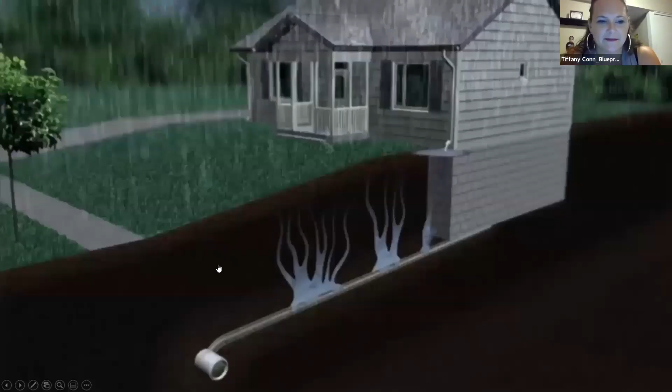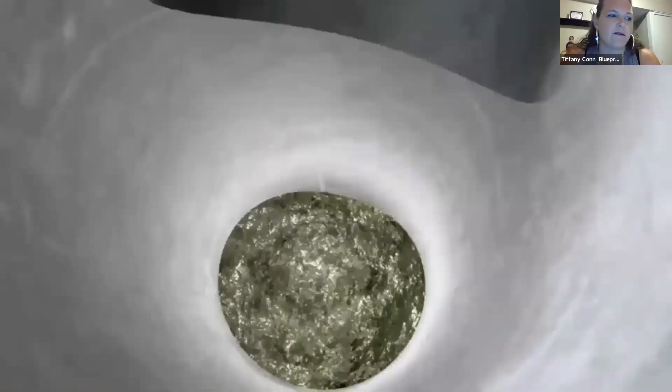So what's happening is when it rains, we have aging infrastructure and water is getting in through these damaged pipes, through cracks, leaky joints, and runoff from the roofs. Most of the rainwater is getting into the system from residential areas. And these sanitary sewers are not built to carry both rainwater and sewer water. So what happens is during large rain events, this water will back up into your basement or will overflow into rivers and streams. So this is what we are trying to solve.

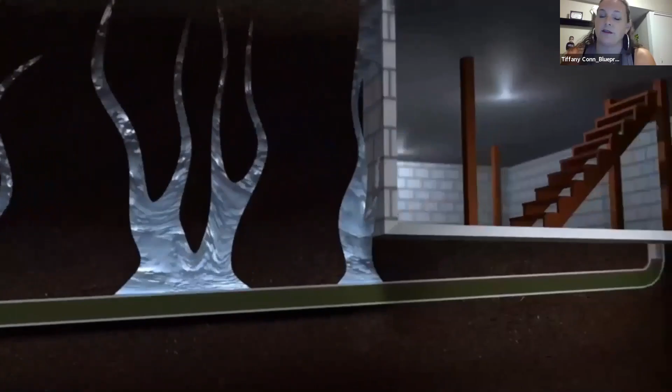As you can see, again, it's just not having the capacity to take the rainwater and the sewer water at the same time. So that is essentially our issue. The water is pouring out into the river, and this is a human health concern. So, we don't want this by our families, we don't want this by our schools, and this is the issue that we're wanting to take care of. Next slide, please.

Little bit of a recap. So this rainwater is getting in through these cracks. So that might be from trees. It might be because the pipe is old, it's made of clay, or the joints between the pipe that attaches to your house pipe might have a little space in it and it's getting in through there.

So we're also concerned with when it's raining really heavy, the rain washing down the street is picking up a whole bunch of stuff. It's picking up trash and pollutants, it's picking up debris, things off of the brakes of your car, just any old thing that's on the street and rushing down, going into the storm sewer, and eventually makes it out into the river. So all in all, our water that's getting to the river is not the cleanest and it is not the healthiest for us. Next slide.

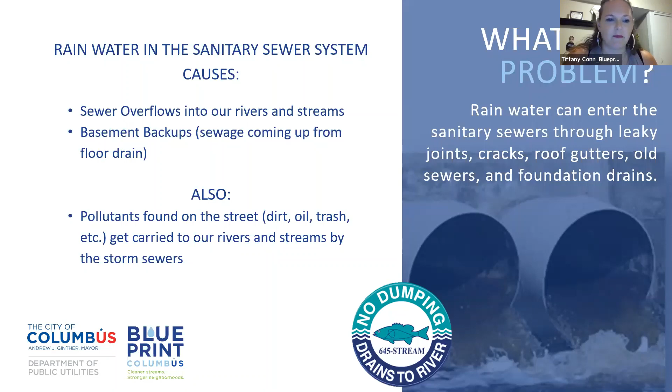So what Blueprint is trying to do is solve this issue at its root cause. So we could build bigger pipes and then that would have the capacity to take the rainwater and the sewer water. But why would we do that? And eventually we'd have to build more pipes or bigger pipes in the future and keep solving the problem that way. So what we're looking to do is start from the beginning at the root source of the issue and get that water to go where we want it to go.

So separate this water to get to the storm sewer if it needs to be, and then the sanitary water to go to the treatment plant where it's supposed to be as well. So we are investing in fixing our existing infrastructure rather than building new infrastructure. What this does is create opportunities to actually improve the water that is making it to the river or the stream. And all of the pieces of Blueprint, which you'll see in just a second, work together to move the water, like I said, where we want it to go.

So we want it to go out to the street instead of be around your house. We want to treat it with green infrastructure so that it is actually cleaner when it gets to the river. And we want to involve the community in this. We're trying to improve the rivers. We're trying to help the neighborhood leave something good behind for the neighborhood and also the local economy. So we use local contractors, designers, engineers, as much as we possibly can so that we're investing back into the local economy. Next slide, please.

Blueprint is going to be and is in 21 different project areas throughout the city of Columbus. As you can see here, they're kind of scattered around, and the one thing that they have all in common is separate sanitary and storm sewer systems. That blank space in the middle, kind of downtown and up through Upper Arlington, has a combined sewer system, and that's why Blueprint is not involved there.

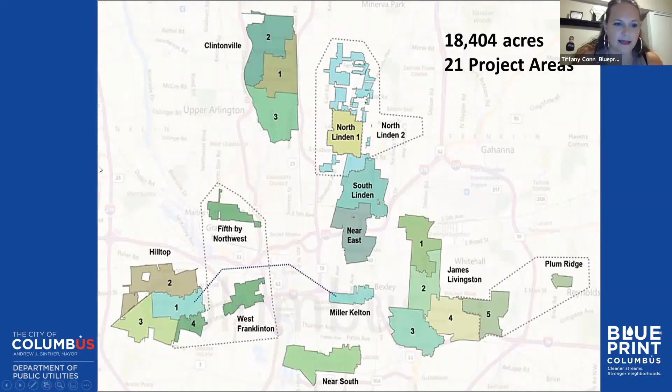Next slide, please. The 4 pillars of Blueprint all work together to accomplish our goal of moving the water where we want it to go. We have lateral lining, roof water redirection, sump pumps, and green infrastructure. We'll go through these in a little bit more detail. Next slide, please.

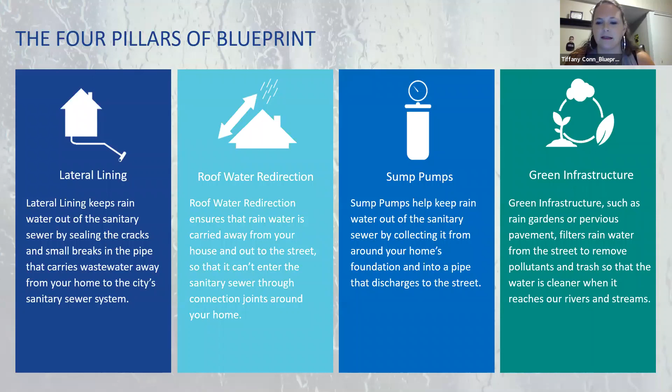Lateral lining might be the most crucial part of our project. What we're trying to do with the lateral lining is seal up the system. That's where the water is getting in the most, in these residential sanitary laterals. What we want to do is check out all the laterals in a project area, see what the condition of them is. If we can clean them and line them, we'll do that.

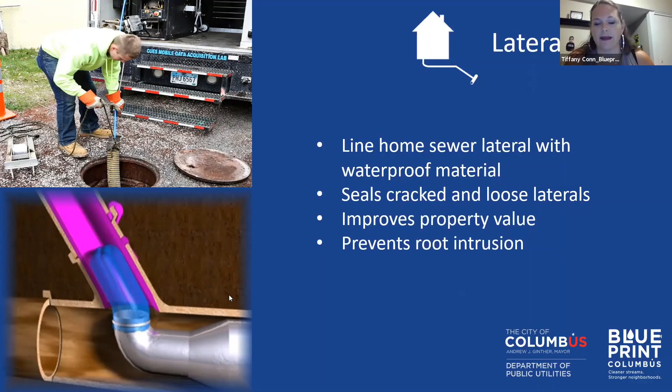We send a balloon-like structure up the lateral. It's got resin on the outside. When that resin cures, it's hard like a pipe. So it's like a brand new pipe inside of that lateral, and it does not allow the tree roots to get in, and it helps prevent cracks and leaks, thereby sealing up the system. It's a really great property value, but it also really helps us keep that water going where it should be going and out of where it doesn't need to be. Next slide.

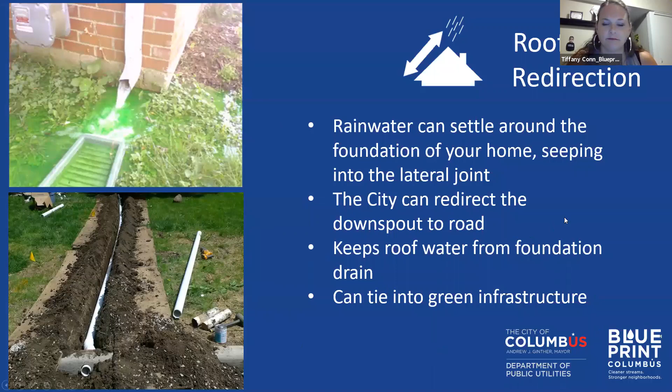Sump pumps are also helping us route the water away from our foundation. And this is, I think, probably one of the most exciting parts for residents: houses in the project area, if the duplex or single family home does not already have a sump pump, has a basement, and we're able to put one in, can get one free of charge from our project.

Some of our older houses have the foundation drain connected to that sanitary lateral. All that water is going straight out to where we don't want it to go. When we put in the sump pump, we try to disconnect that and connect it to the sump pump so that the water goes out to the street where it's supposed to go. It also helps with seeping in the basement. So it's also a benefit to the homeowner, to help get water away from your house and keep your basement a little drier.

The city does provide the installation, the sump pump, and a backup battery. We are currently installing sump pumps in Miller Kelton. If you are interested, in the chat you can put your name, your phone number, your address, and email, and we will sign you up for that. You can also shoot us an email. I believe we can put a link in the chat as well so that you can go straight to the link and sign up. Next slide.

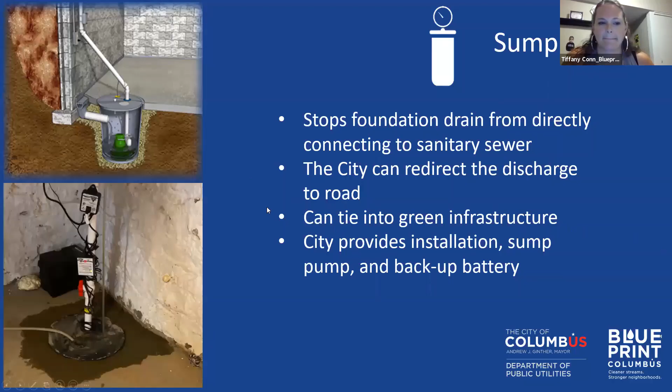Today we're going to focus on green infrastructure. You probably want to know what's going to happen in your neighborhood, but I want to make sure we know why we're doing this first.

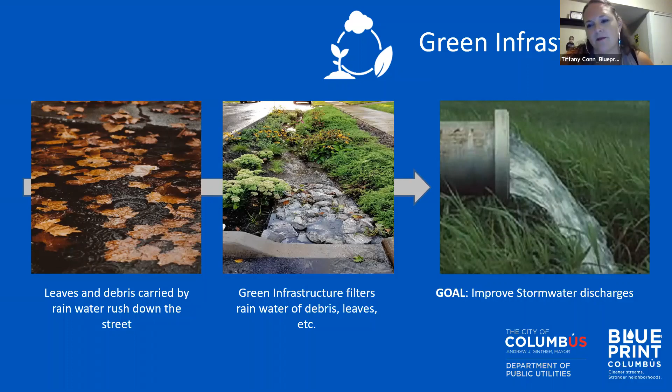When rainwater is rushing down the street, it's picking up leaves and debris, and we don't want that. It goes into the storm sewer and ends up in the river a little dirty. If we can send this water through green infrastructure, we can filter out that debris and leaves before it makes it to the river, so it's cleaner when it gets there.

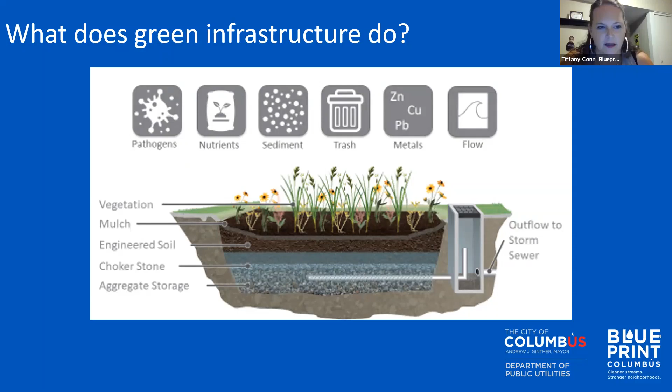Pervious pavement is kind of a crazy construction process, but it's really beautiful when it's done, and it helps in other ways too, like calming traffic - people driving down these pervious pavement streets tend to drive a little slower. It filters out the trash and debris, just like a rain garden, and it actually reduces street flooding by giving that water somewhere to go instead of just sitting there.

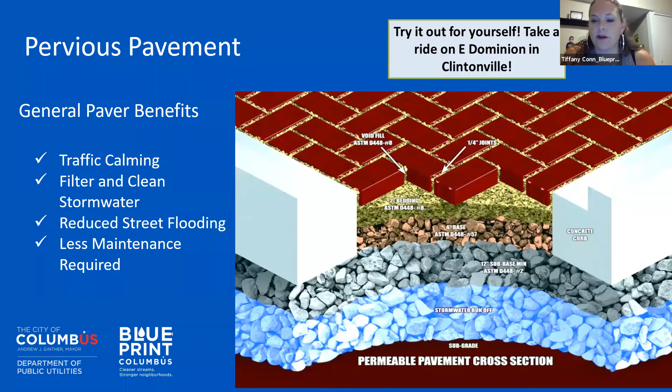The most important part of all of this is that the city is responsible for maintaining all of the rain gardens and all of the pervious pavement streets. Currently we maintain them once a month, but we can do it more if needed. We use our 311 system for residents who live near a rain garden - if they see something they'd like us to attend to, they can file a 311 service request, and we usually make it out there within a week or so.

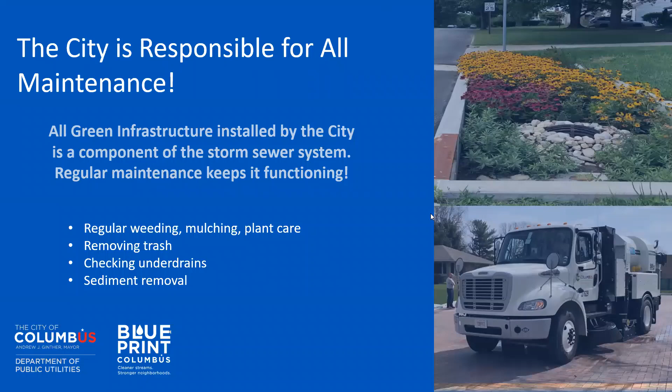Thank you, Tiffany. The Blueprint project area, Miller Kelton, the total basin area is 342 acres. The number of residential properties we're looking at is 1,422.

The overall project boundary: on the north side we have I-70 and East Main Street. On the south, Livingston Avenue. On the west, 18th Street and Livingston Park. On the east side, Nelson Road and Rhodes Avenue.

For a project area of this size, we broke the project into two separate areas: Newton Bedford and Kent Fairwood. The Newton Bedford boundary, on your left, has South 18th Street as the west boundary, Miller Avenue as the east boundary, Newberry Street as the north, and Livingston Avenue as the south. For Kent Fairwood on your right, the west boundary is Miller Avenue, the east is Nelson Road, the north is East Main Street, and the south is Livingston Avenue.

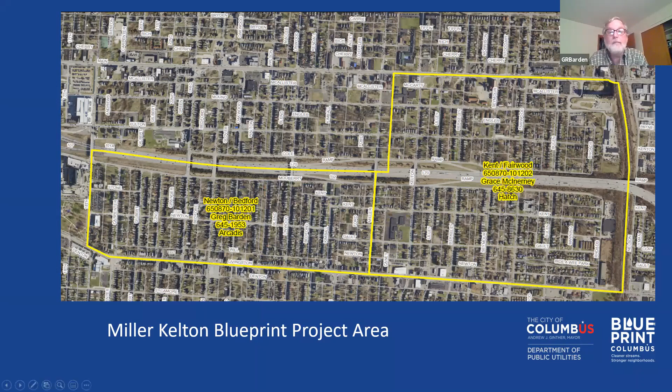As indicated on the sanitary sewer overflows, we have 9 within the project area, and we track their overflows and report those to the EPA. Sanitary sewer overflows basically have a risk of exposure to the residents, either through their discharge to Alum Creek or through their backup into a basement, which we call water in basements.

We have looked at the overall pipe conditions with the CCTV sewer inspection that was done as part of the rehab of the sanitary sewers, lining, and manhole rehab.

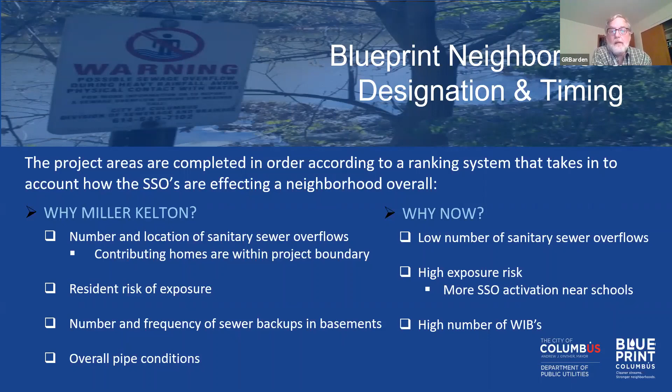Looking at the 4-pillar timeline, the rehab of sanitary sewers and manholes was performed in 2014 under a city project annual lining contract.

Regarding sump pumps, the number of homes that we want to look at in the project area is 1422. Our goal is to install 355 sump pumps, or 25% of the homes, and we're still looking for volunteers for sump pump installation.

Our start date on the sump pumps was January 2019. Currently, we've installed 173 to date. We would hope to have a second phase of sump pump installations to install at least 182 more to meet our project goal.

The green infrastructure timeline for construction is 2022 and 2023 for the startup. For lateral lining, we hope to start in year 2024, with roof water redirection following that.

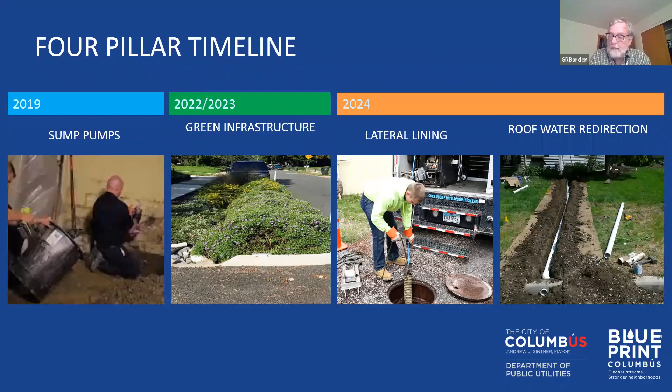Basically, the selection is based on the stormwater drainage patterns and siting criteria for the proposed GI. Our proposed types and locations of GI preference starts on the left and moves to the right.

Our preference is land banks and parks, since they are the most efficient and least disruptive during construction. However, these are not the most feasible due to the lack of availability within the project area, or their location within the project area, which means there's insufficient stormwater flow to those.

The next preference would be to locate green infrastructure within the right-of-way behind the curb, which is a high preference. But again, we have to look at conflicts with utilities: water, sewer services, gas, electric, fiber.

We have to look at trees, the impact to trees, the distance requirements between the rain gardens, distance requirements from intersections and driveways, offsets, existing sidewalk conflicts, or designing those for future sidewalk installation, and other design criteria that limits the percentage of the lot frontage we can use for a basin.

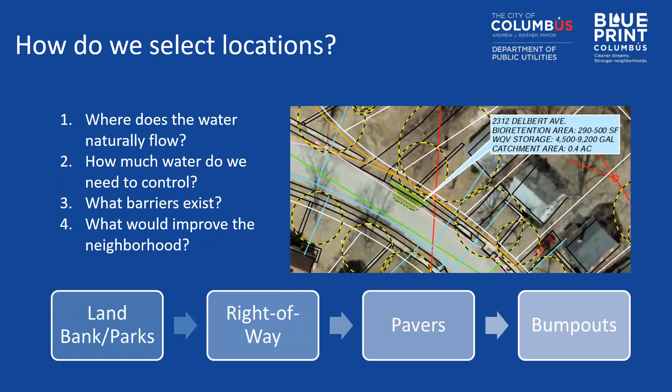And then that leads to bump outs, which are our least desirable. They again have the potential for conflicts because they add to the reduction in the street width at their location. They're more costly than the other types of GI, potentially more than the right-of-way basins, and they will also potentially result in a loss of parking.

And because of their installation and loss of parking, they will require signage and delineators in the neighborhood.

But even after our available locations are somewhat determined, we still have to determine how effective and efficient all the proposed GI would be within the big picture of the project area. So basically, that's a summary of how we look at determining where the proposed GI should be in a project area.

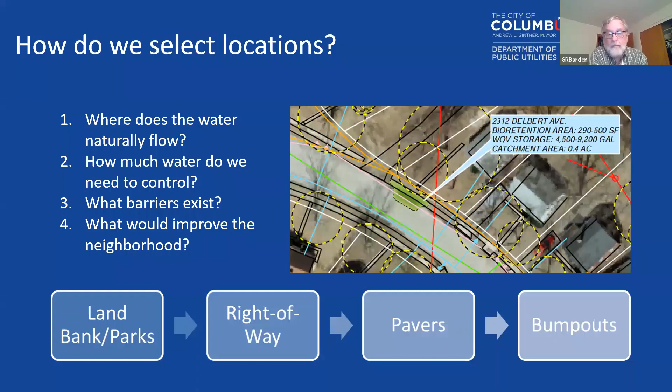I think we're going to turn it over to Bill. Yeah, I'm Bill Landshof with Arcadis, and I'm going to present the specific information within the Newton Bedford project area.

To recap the general overview of the project, what we're proposing to do is add storm inlets. These curb inlets will be added to areas where we observed flooding or where, based on our modeling, we anticipate flooding may occur. We're adding additional curb inlets to remove water from those intersections. In addition, we're proposing 3 rain gardens, which will be on land bank parcels. This gives us the opportunity to both retain the water and treat it to improve water quality downstream.

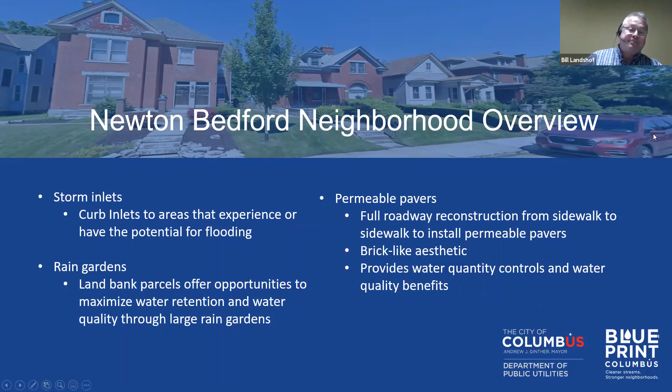Next slide, please. So the project area for Newton Bedford, I believe Greg outlined this, but this is a blown up version of it. The yellow line here shows the project area. Within the yellow, there is a smaller subsection, the teal color, which represents the Old Oaks Historic Area. So we have to meet the historic criteria within that area, which is why it's designated that way.

So going from west to east, we'll be doing work on Carpenter Street, 22nd Street. The blue areas, you'll see one up at Mooberry and Champion - those represent rain gardens. We're doing rain gardens at South Champion Street, also on Miller. We'll be putting 2 others. Additional work will be done on Linwood Avenue and Kimball Place.

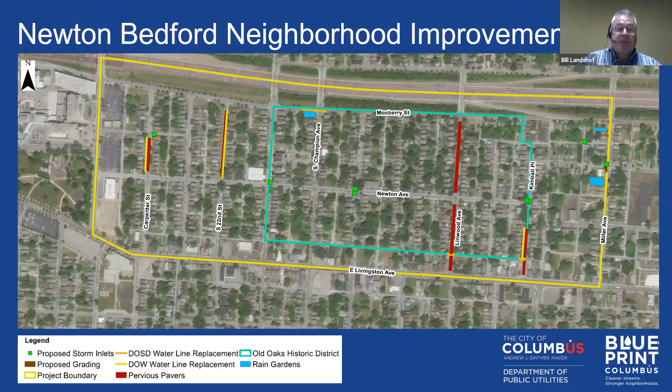Next slide, please. For a detailed breakdown of the work: on Carpenter Street, we're proposing to put pavers from Stone Avenue to Newton Street. This will include new sidewalks and curbs on both sides of the street, new water line, and an additional curb inlet on Stone Avenue. On South 22nd Street, pavers will be installed from Mooberry Street to Newton Street, also including new sidewalks and curbs on both sides, new water line, and a new tree lawn.

The next would be on Linwood Avenue. We're proposing to put pavers from Mooberry Street to East Livingston Avenue. This will include new sidewalks and curbs on both sides of the street. Since Linwood Avenue is within the historic area, they will also get sandstone curbs, and we'll be updating the tree lawn.

Kimball Place will also be getting pavers from Gault Street to East Livingston Avenue. This will include new sidewalk and curbs on both sides of the street. The curbs will be sandstone curbs. The proposed design will maintain the historic wall located on Kimball Place, and we'll be constructing a new water line.

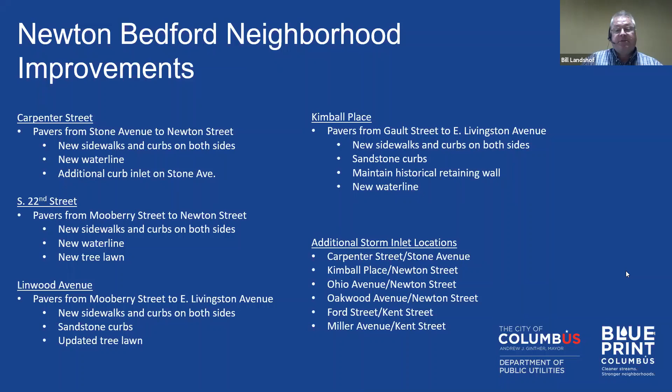In this location, we're going to have landscaped walls in a tiered structure down to the basin wall. We'll have trees, shrubs, and plants planted both in the basin and down the hillside, and we'll provide 3 inlets for this location. This intersection sees a lot of flooding and water coming down, so we've provided 3 inlets to capture the flow.

The second rain garden site will be located at Miller Avenue, south of Kent. This is a land bank parcel. Here we'll have sloping walls for the basin, and a head wall or decorative wall when you come into the basin - it would be landscaped brick or landscaped stone. We'll have a dividing wall between the 2 cells of the basin. Again, this basin will have trees, shrubs, and plants, and we're providing 1 inlet to take water off of Miller Avenue.

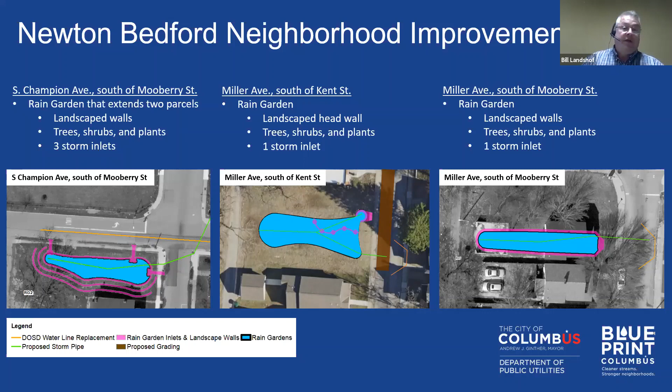So if we take a step back and look at what has changed since the 60% plan set, back in October 2019 we submitted plans to the City of Columbus. Through a series of comments from residents, other city departments, and other utilities, a series of changes were made to the plan set.

The first item is that permeable pavers on Kimball Street were modified, based on comments from the Historic Resource Commission for the Old Oaks Historic District, as well as DPS, to address their concerns. We removed the tree lawn from Kimball Place and the replacement trees from Kimball Place as well. The design now is more in line with what's already there—it will be more of a substitution or replacement of existing materials.

Another item: we removed the permeable pavers and waterline improvements on Bedford Avenue. This was a change in scope of work. Based on comments from both Columbia Gas and other city departments, we removed the pavers from this section.

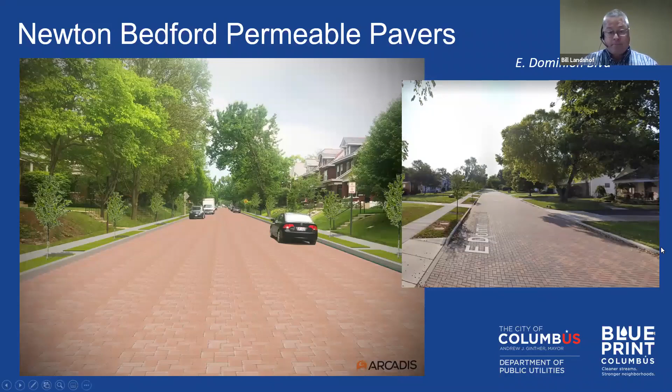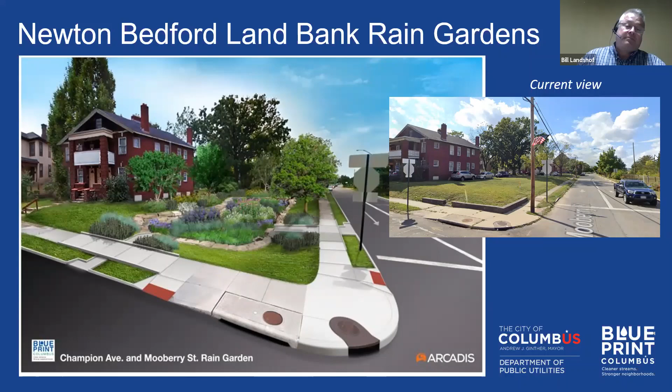So if we take a step back, there's some other impacts to the residents, some would call them improvements, to a lot of the infrastructure in there that once we get in there, we'll have to update and make changes. So I just want to go down through a list here and give you an idea of what additional work is coming, starting with the aged water line.

There are several locations where we suspect there to be lead water services. Where we're replacing the water line, we will use this opportunity to replace those lead services.

Curb cuts. We are also proposing, where we're replacing the curb, that this would be all locations where we're putting permeable pavers, to provide two curb cuts for each property. This will allow us to tie in existing downspout redirections or pump discharges into a curb cut that will be provided under the sidewalk. Also, in future projects when there are downspout relocations, this will give a location for the downspout to be relocated to, and will prevent us from digging up a sidewalk or curb we've already just constructed.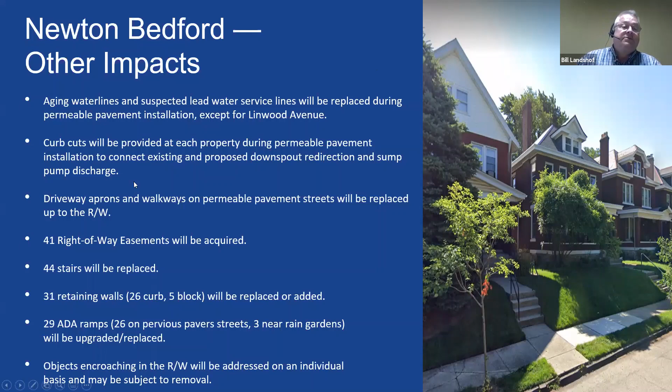The city has a requirement that when we take out trees, we replace them. This is an executive order that the mayor signed several years ago. The replacement policy says basically, if there's 25% of the critical root zone that's impacted, then we should remove the tree because the likelihood of dying is significantly increased. The tree could die off immediately, or it could be several years down the road. So as a precaution, we would remove the tree as part of the project.

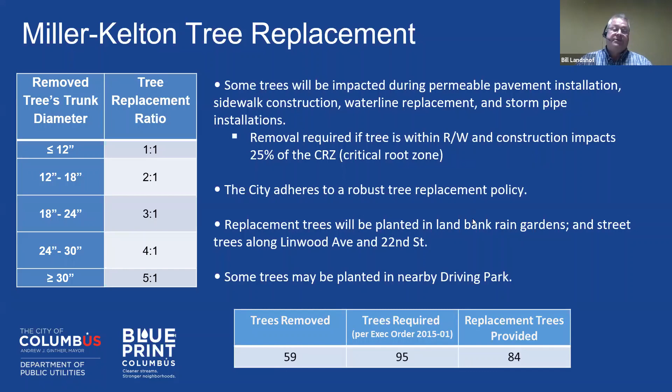Next, Matt Kiefer will discuss Hatch's project, Kent Fairwood.

Yeah, thank you, Bill. Hey, Bill, before we move from you, just a quick question we had, which was around the Linwood: when we put the permeable pavers in, is that going to make the street wider, more narrow, or is it going to be pretty much the same? All the permeable paver roads will be the same footprint. We're not changing the footprint. The curbs will be in the exact same spot for all the streets.

Very good. All right, Matt, take us away. Thank you, Bill. All right, thank you, Mo. And thanks, Bill. Hi, everybody. My name is Matt Kiefer, and I'm with Hatch, and we're the design engineer responsible for the Kent Fairwood improvements. And our team's working really closely with Grace McInerney, who is the City of Columbus project manager for this area. And we're really excited to share with you the latest updates on the progress we've been making since our last meeting. Next slide.

So as many of you know, the Kent Fairwood area is shown here just east of the Newton Bedford area. So again, we are bounded by Miller Avenue to the west, East Main Street to the north, the railroad tracks to the east, and Livingston Avenue to the south. Next slide.

So the Kent Fairwood project area that I described is quite large, and like Greg had mentioned previously, it covers about 260 acres with over 900 residential homes and over 200 commercial, industrial, or institutional properties. And stormwater in this area does not just flow in one general direction towards a single outfall. The stormwater actually flows to multiple outfalls.

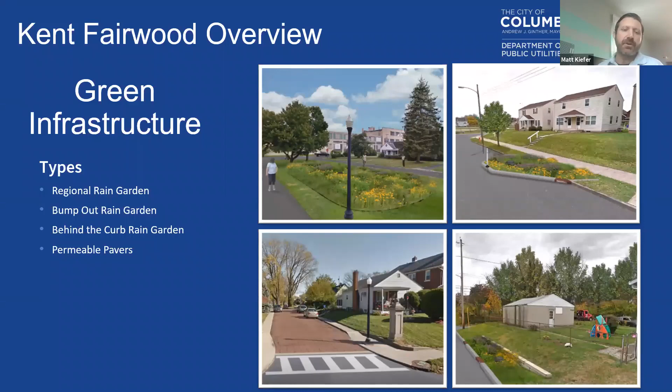And so in our Kent Fairwood area, we had to utilize a range of green infrastructure options in order to capture all of that flow and achieve our water quality and water attenuation goals. And these BMPs fall into 4 categories, which are regional rain gardens, bump out rain gardens, behind the curb rain gardens, and permeable pavers. Next slide.

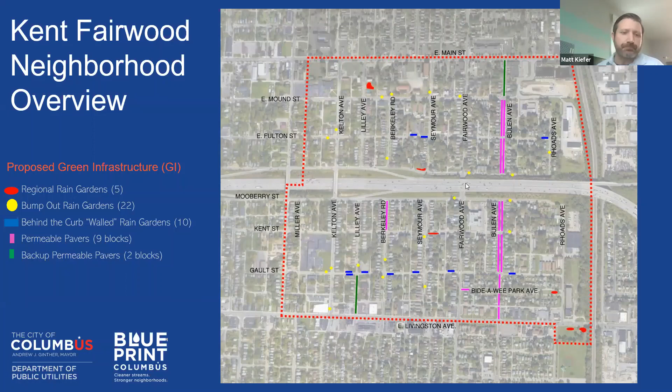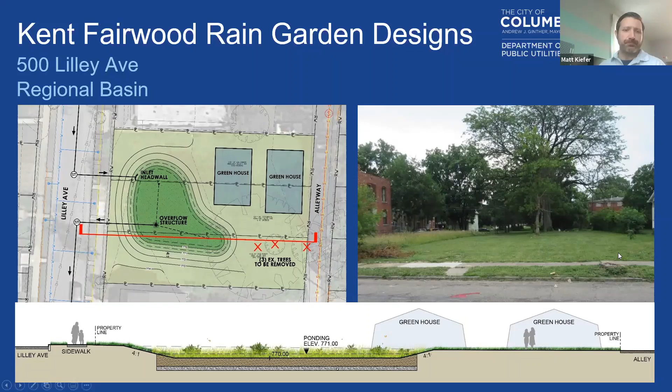And we use herbaceous plants and pollinator plantings and ensure that the basin dries within 24 hours. These basins are not wet ponds, and they're not designed to hold water for prolonged periods. They are designed, again, to drain within 24 hours. Next slide.

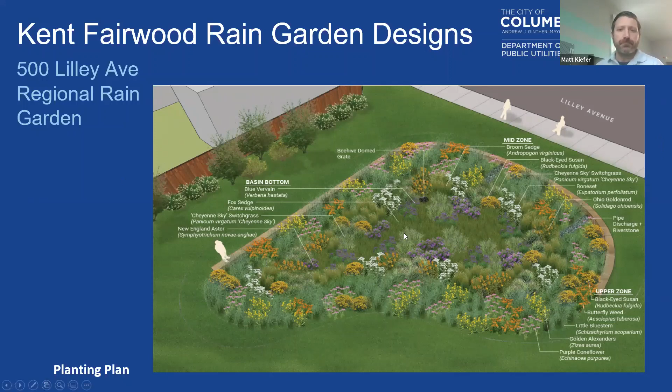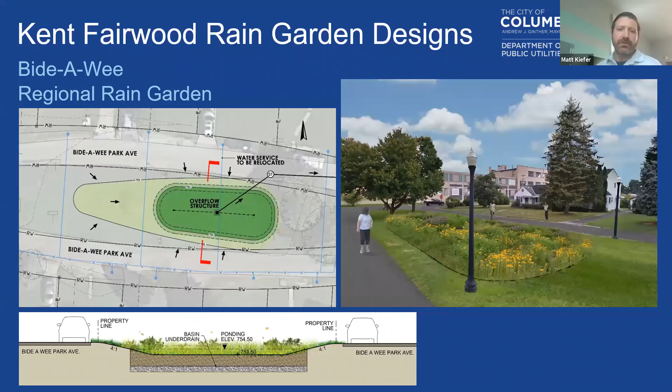And so here we have our Bide-A-Wee rain garden, which again takes overland flow from the grass median along with street runoff. The rendering at the right shows this proposed concept. Next slide.

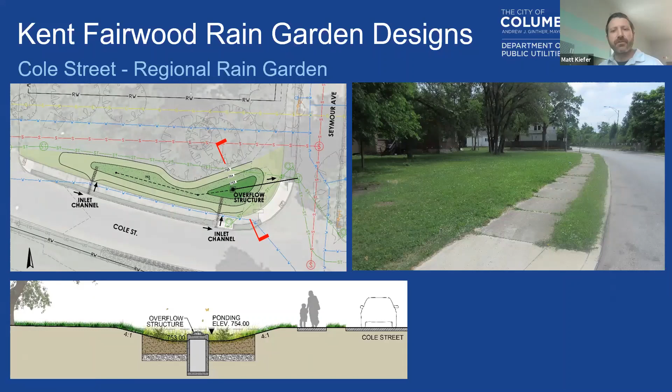And our next regional rain garden is located at the corner of Cole and Seymour. And this will operate similar to Lilley Avenue Garden, taking overland flow from the green space and also treating runoff from Cole Street. Next slide. The regional rain garden at Kent and Seymour, again, functions very similar to Lilley Avenue, and that's shown here. Next slide.

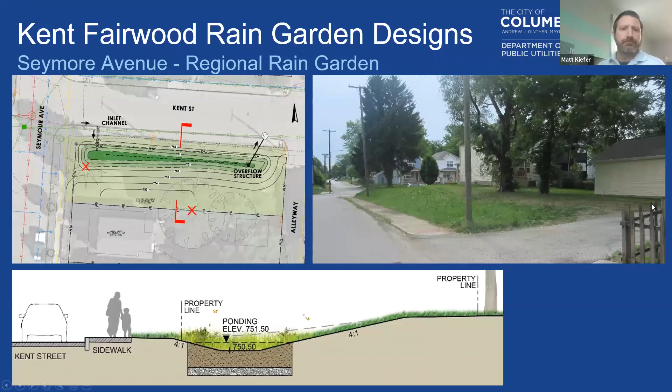So those previous regional rain gardens that we just went through, these have not really changed much from the last presentation that we gave. More or less, those designs are very, very consistent with the 60%. But what has changed quite significantly is the rain garden at Driving Park. And so I'm really excited to share with you some of those updates. Our previous design showed the basins located near the intersection of Livingston and Rhoads.

We received feedback from the community that wanted to see these basins moved further towards the railroad tracks, as the intersection was really a focal point and entrance to the park. We also received feedback that the design should provide usable space and also incorporate the existing flagpole and memorial. Feedback also emphasized leaving plenty of space for sporting events like kickball and other gatherings.

And so the revised concept addresses those concerns, and we were able to shift the basin from the intersection and incorporate 2 walled basins that still achieve the same water quality goals of the project. When we do move the basins closer to the railroad tracks, we are working against the drainage pattern, and that did result in the need for 2 walled basins. But having the 2 walled basins allows us to install a new connection path between the basins from Livingston Avenue to the existing path in the park.

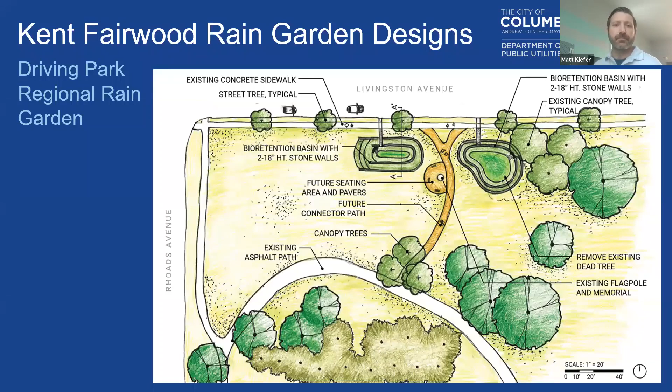There will also be a paved seating area around the flagpole and the monument, and we have proposed additional trees along Livingston Avenue and also where the new path meets the existing. Next slide. Here we just show an overall section of the driving park. This is the Western Basin, which is 24-foot wide and has 2 step downs utilizing 18-inch high stones. Next slide.

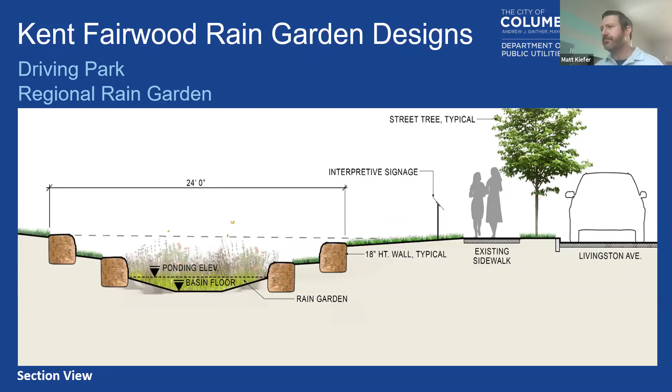Here on the left are a couple examples of the type of natural stone that the walls would be constructed of at the regional basins. And then also on the right, you can see an example of the educational signage that will be installed. And this explains how the regional rain gardens function and what types of vegetation and wildlife that you can expect to see. Next slide.

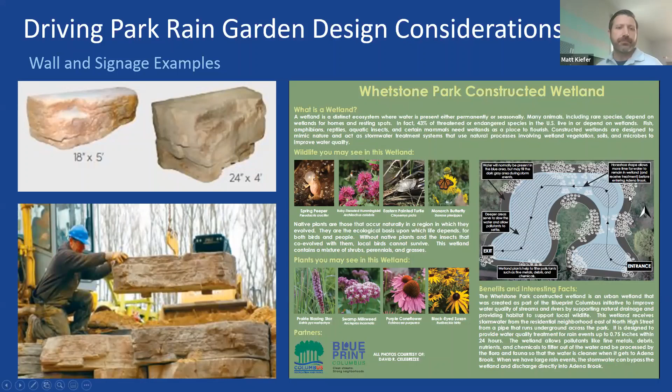In locations where larger regional basins won't fit, and again, to capture all the flow that is present within our drainage area, we provide smaller rain gardens behind the curb and still within the city right-of-way. We use similar stacked stone in lieu of precast concrete units. And our goal with the design of the behind the curb basins is that these structures should look like landscaping features and not a stormwater facility. So that's really what we're working towards. Next slide.

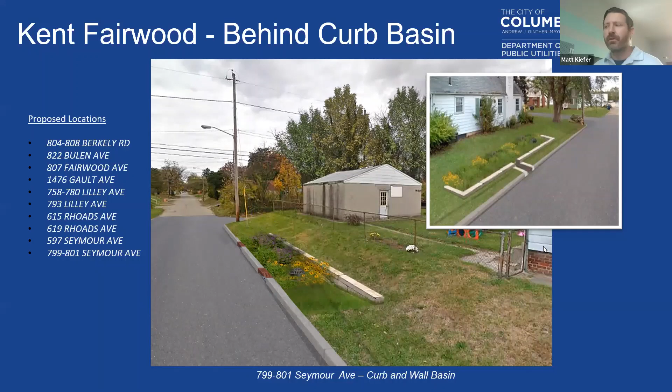Very similar to the behind the curb basins in concept are the bump out street basins. These basins function the same, but they can be used where the right-of-way is too narrow to accommodate a behind-the-curb basin. Bump-out street basins are also useful to define parking regions, and also they neck down the roadway and have a traffic calming effect. Next slide.

And then the last green infrastructure tool that we're utilizing on this project are permeable pavers. This system allows water to infiltrate between the paver stones, like Tiffany discussed, and it filters through the gravel subbase. Some of the flow is able to percolate into the subgrade, but most of it's just filtered and collected through under drains and then discharged into the storm system.

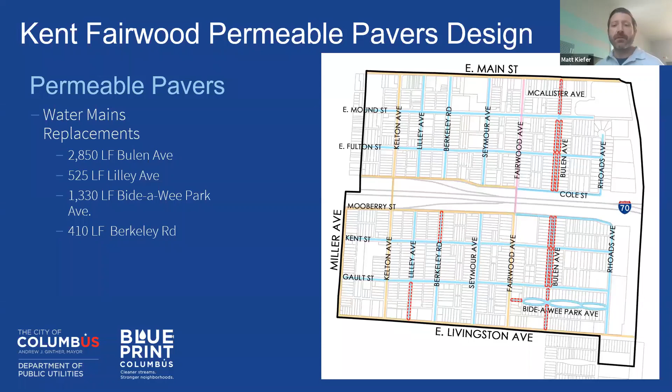Since we need to completely excavate the roadways to install these new permeable pavers, we are working with the Division of Water to be proactive and replace older water mains that have become brittle with time and are subject to breaking or leaking. And we have planned actually around a mile of water main replacements within this project area. Next slide.

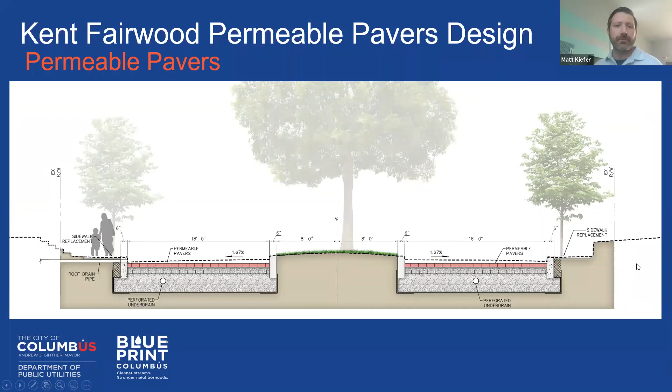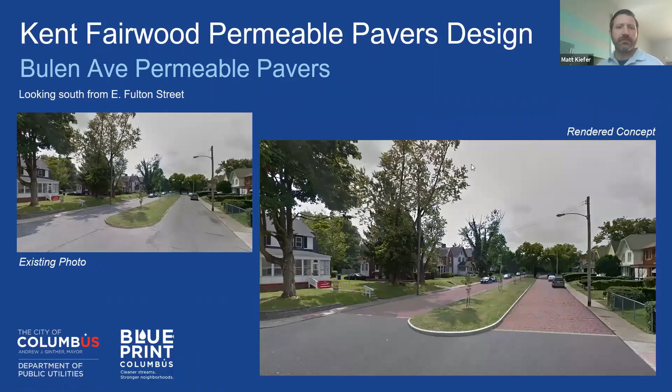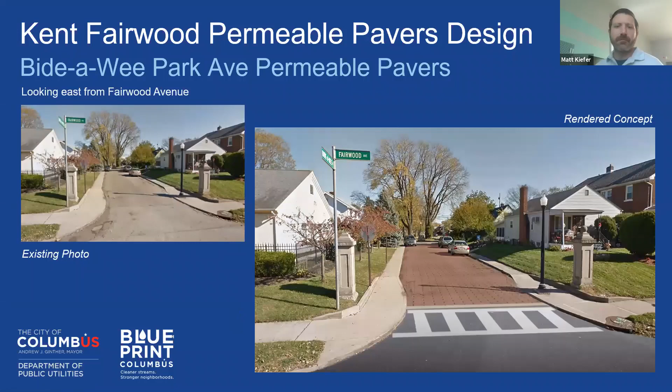And so just to recap some of the major changes in the Kent Fairwood area since 2019, our behind the curb basins are now utilizing stacked stones, and some of the sizes and geometry of those basins have been updated. But most significantly, the updates have taken place at Driving Park, where we've relocated the two basins and incorporated the pathway and flagpole memorial into the design. Next slide.

And very similar to the Newton Bedford area, we do have impacts at the permeable paver streets. So again, very similar. We have several easements, in this case around 57 locations, where those roadway improvements will extend slightly into the private property, in order to perform the regrading or seeding, stair replacement, or retaining walls that will need to be added or replaced. And you can see those numbers there.

We're also planning significant curb ramp replacements. So in our area, nearly 100 were impacted. So, whether that was because the proposed design would interfere with the curb ramp and warrant replacement, or whether one needed to be brought up to standards. So we will be doing significant work to get those up to date. Next slide.

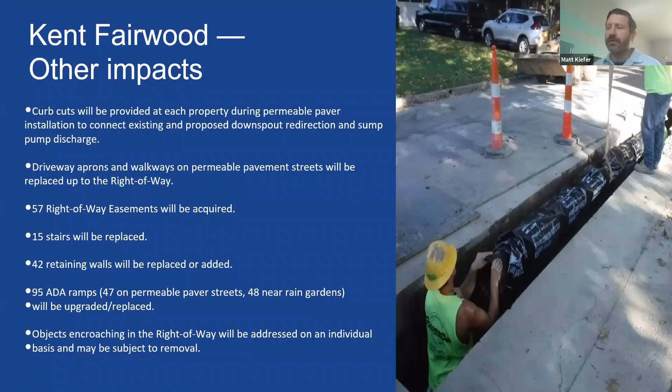And so one of the primary considerations that we look at during design is to avoid tree removals whenever possible. We have an arborist that evaluates every single tree on these projects. And if they can be saved, we try the best we can to do that. We're currently showing 9 trees to be removed, and we will be planting twice as many in place. And we will be adding those throughout the right-of-way and park areas where it makes sense. And so that covers the overall Kent Fairwood update. I'll hand it back to Mo to take any questions.

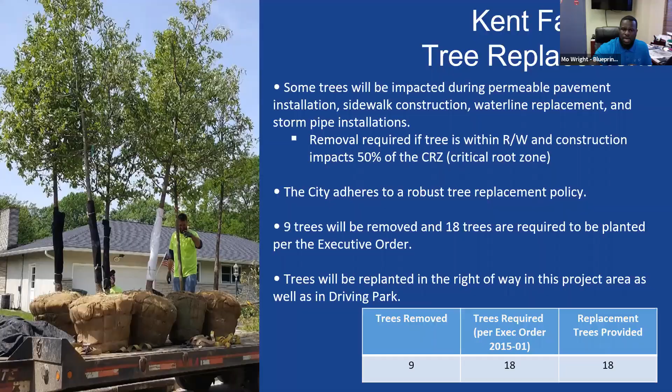Great. Thank you to all of the presenters, and a lot of information there. Now it's really time to see if there are any additional questions from you. If you want to use the raise hand feature, feel free to do that, or you can drop those in the chat really quickly. But just to recap, today was about giving you an update at what is kind of the finalization of the design plan. Pretty much every year for the last couple of years, we've been doing a public meeting, getting feedback from you around how the design is emerging. And today we lay out where the design is as it moves toward the implementation.

You may have questions about your specific streets or some of the renderings that you saw, and so those questions are appropriate. And if it's not something we can get into specifically tonight, as I said at the beginning, both the email and the phone number for Blueprint are on the screen there. You can at any time reach out via either of those methods to get property-specific questions answered, or if it's about a tree or something in the tree lawn in front of your home, feel free to use it for that reason. So my team will help me in terms of the specific questions that you all have.

I did see one. Andy, you had a question around clarifying if the gutters and downspouts in the area would be replaced where we're also doing permeable pavers. Design team, it looks like we're talking about Linwood Avenue. So the design team from Linwood, obviously that's a different pillar of Blueprint. The timelines will be different, but generally speaking, I think the answer is yes, but certainly chime in with any additional information around that question from Andy.